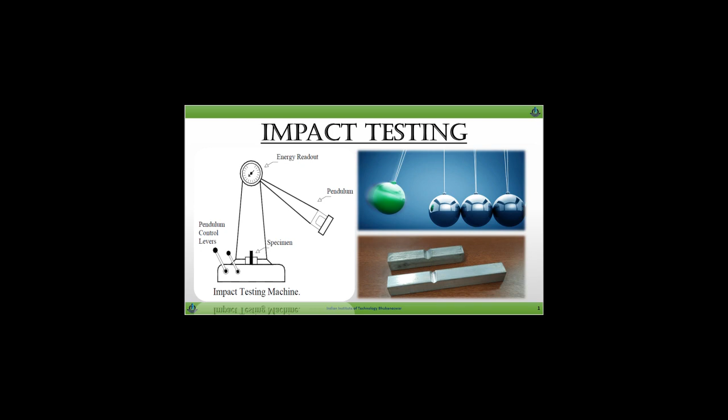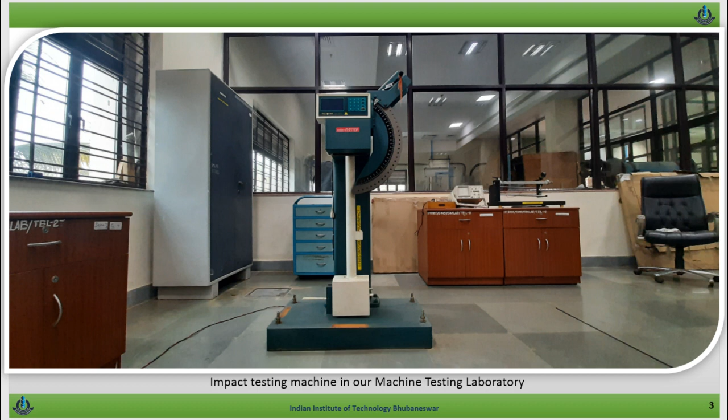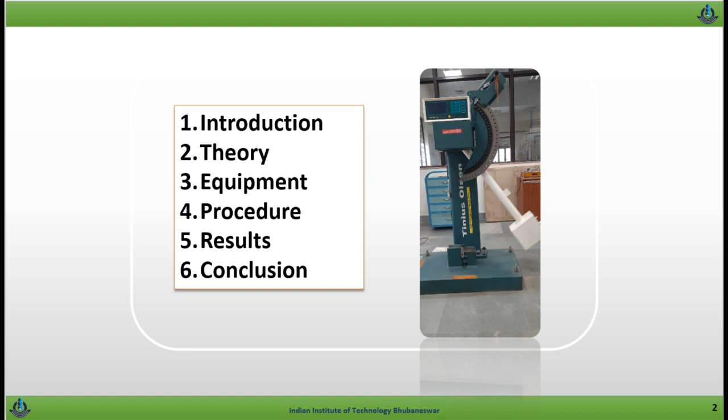Impact test is a material test. In mechanics, an impact is a high force or shock applied over a short time period when two or more bodies collide. Such a force or acceleration usually has a greater effect than a lower force applied over a proportionately longer period. The effect depends critically on the relative velocity of the bodies to one another.

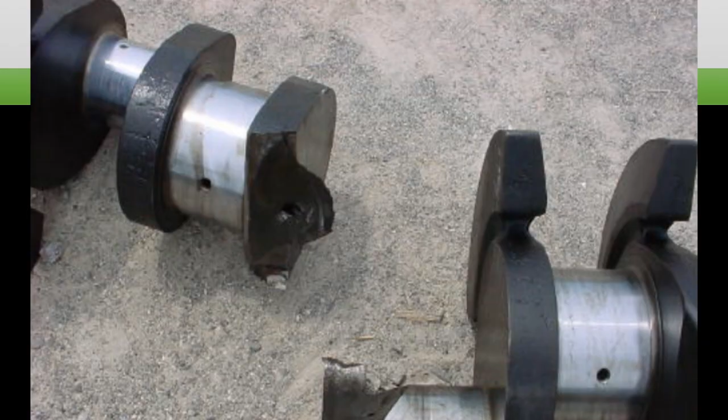Impact is a very important phenomenon in governing the life of a structure. For example, in the case of an aircraft, impact can take place by a bird hitting a plane while it is cruising, or during takeoff and landing, the aircraft may be struck by debris present on the runway, as well as other causes. It must also be calculated for roads if speed breakers are present, and in bridge construction where vehicles cause impact loads, etc.

Impact tests are used in studying the toughness of material. A material's toughness is a factor of its ability to absorb energy during plastic deformation. Brittle materials have low toughness as a result of the small amount of plastic deformation they can endure.

Impact testing most commonly consists of Charpy and Izod specimen configurations. Therefore, two kinds of impact tests are discussed here: one is the Charpy test and the second is the Izod test.

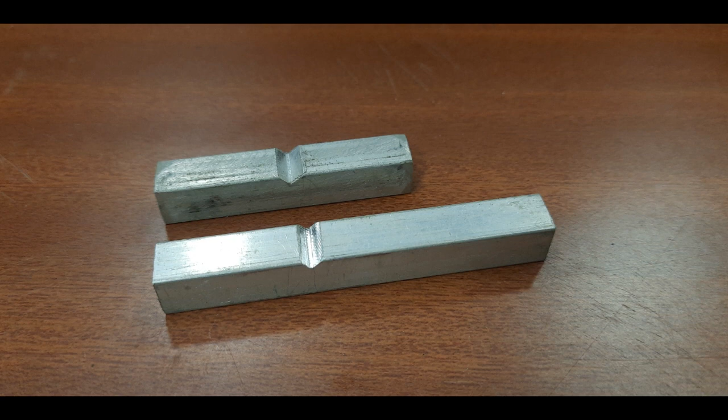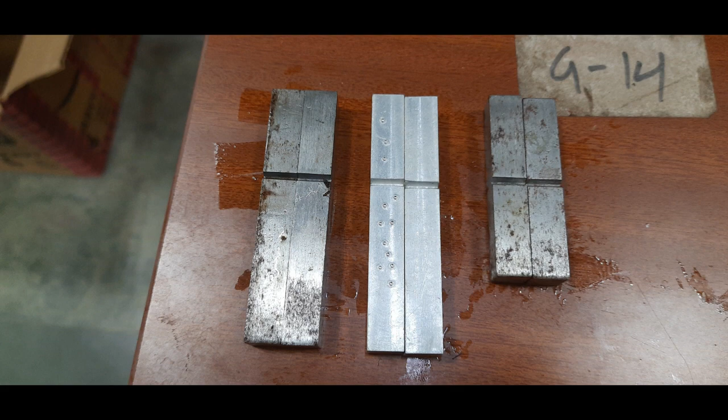The Charpy impact test, also known as the Charpy V-notch test, is a standardized high strain rate test which determines the amount of energy absorbed by a material during fracture. Absorbed energy is a measure of the material's notch toughness.

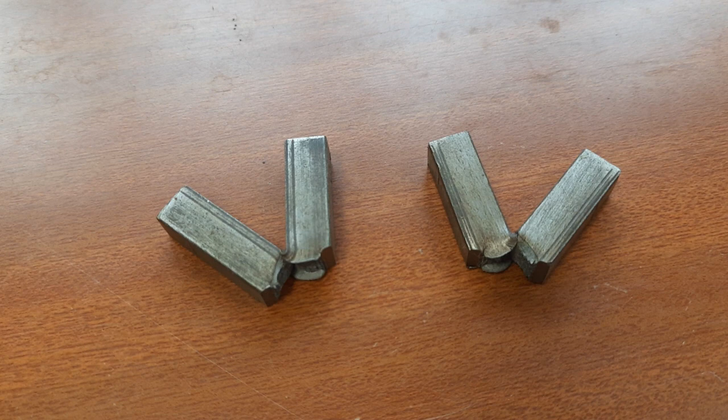The test was developed around 1900 by S.B. Russell and George Charpy. It is widely used in industry since it is easy to prepare and conduct. The results can be obtained quickly and cheaply. A disadvantage is that some results are only comparative.

According to ASTM E23, the standard specimen size for Charpy impact testing is 10 mm by 10 mm by 55 mm. The specimen in the Charpy test is loaded in a 3-point bending configuration.

In our lab, for the test, we choose the ASTM E23 standard from the other various standards. Apart from that, there is the Izod test.

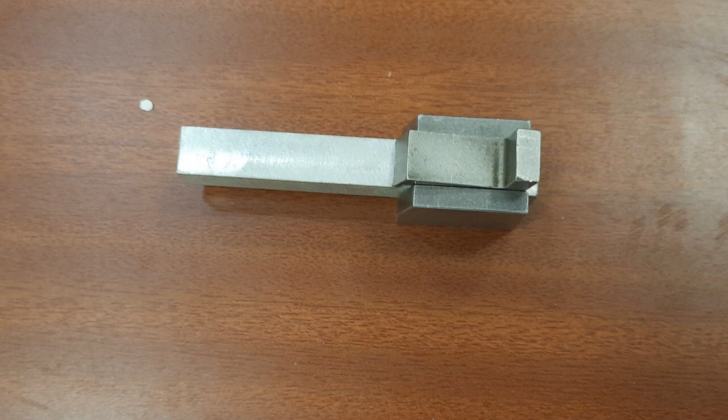The Izod impact strength test is an ASTM standard method of determining the impact resistance of material. The test is similar to the Charpy impact test but uses a different arrangement of the specimen under test. The Izod impact test differs from the Charpy impact test in that the sample is held in a cantilever beam configuration, in contrast to the 3-point bending configuration in the Charpy test.

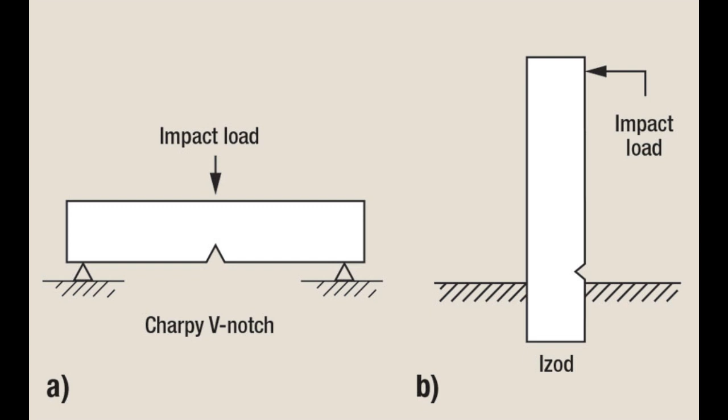The test is named after the English engineer Edwin Gilbert Izod. According to ASTM E23, the standard specimen size for Izod impact testing is 10 mm by 10 mm by 75 mm, which has been taken for our test.

The impact value of a material can also change with temperature. Generally, at lower temperatures, the impact energy of a material is decreased. The size of a specimen may also affect the value of the Izod impact test because it may allow a different number of imperfections in the material, which can act as a stress riser and lower the impact energy.

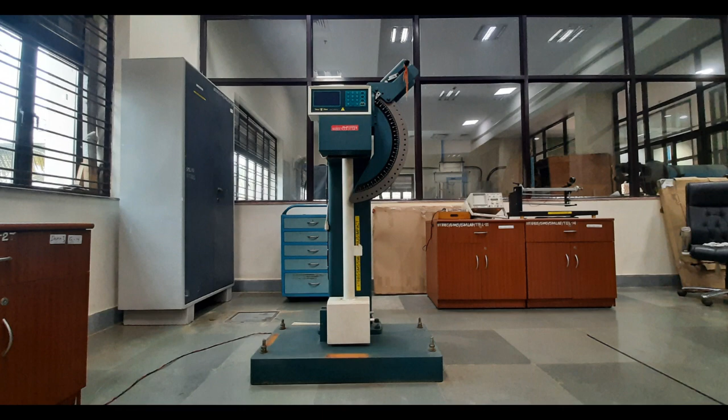The impact tests are conducted on instrumented machines capable of measuring less than 1 foot-pound to 300 foot-pound, at temperatures ranging from -320 Fahrenheit to over 2000 Fahrenheit.

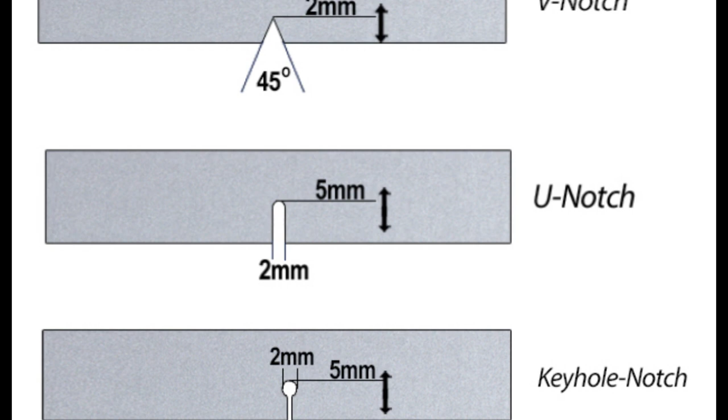Impact test specimen types include notch configurations such as V-notch, U-notch, keyhole notch, etc. The notch in the sample affects the result of the impact test. Thus, it is necessary for the notch to be of regular dimensions and geometry.

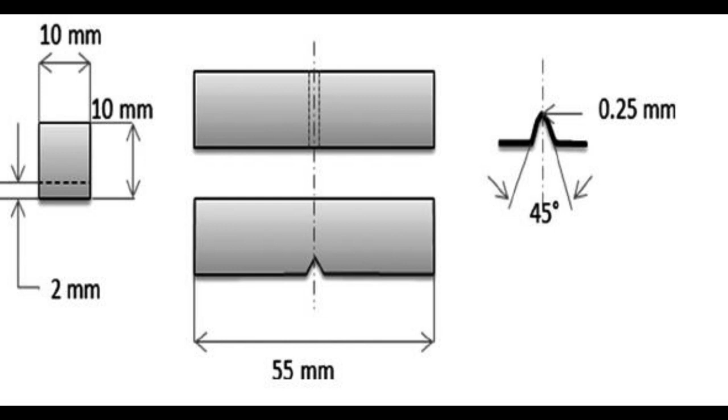The standard method for notched bar impact testing of metallic material can be found in ASTM E23, ISO 148, and etc., where all the aspects of the test and equipment used are described in detail. Currently, in our lab, we use the ASTM E23 standard for testing.

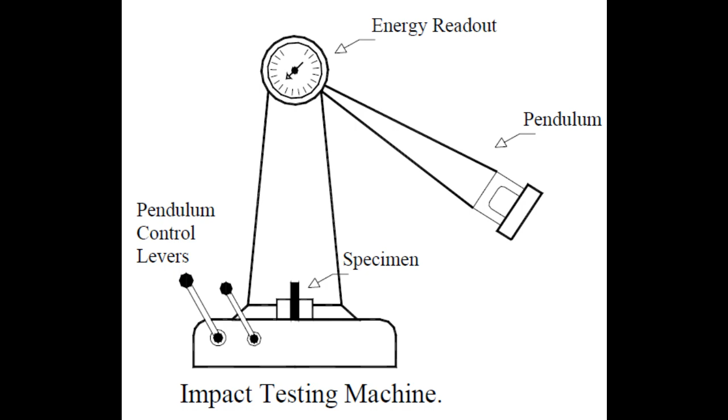In this test, the apparatus consists of a pendulum of known mass and length that is dropped from a known height to impact a notched specimen of material. The arm swings down, hitting the notched sample, breaking the specimen.

The energy transferred to the material can be inferred by comparing the difference in the height of the hammer before and after the fracture, that is, the energy absorbed by the fracture event. The apparatus for performing the impact test is illustrated schematically in the figure.

The load is applied as an impact blow from a weight pendulum hammer that is released from a position at a fixed height h naught. The specimen is positioned at the base, and with the release of pendulum, which has a knife edge, it strikes and fractures the specimen at the notch.

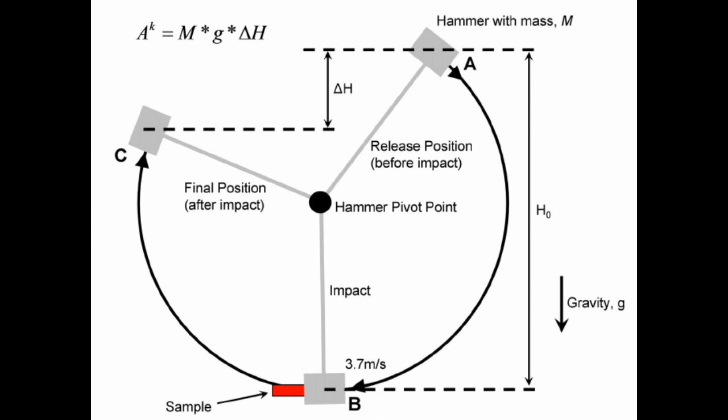The pendulum, after its swing, rises to a maximum height h dash, which should naturally be lower than h naught. The energy absorbed at fracture, E, can be obtained by calculating the difference in potential energy of the pendulum before and after the test, such that E equals mg times h naught minus h dash, where m is the mass of the pendulum and g is the gravitational acceleration.

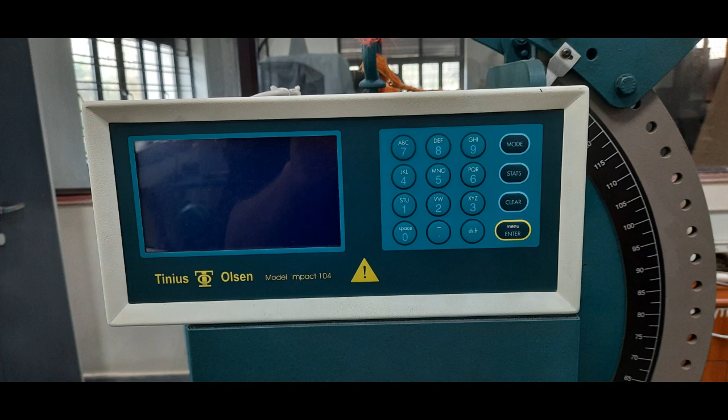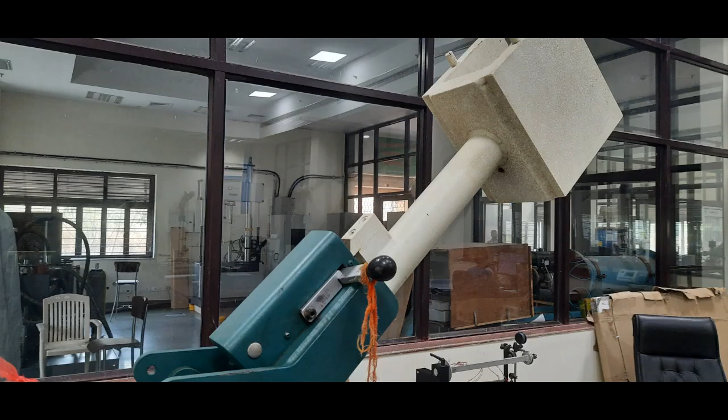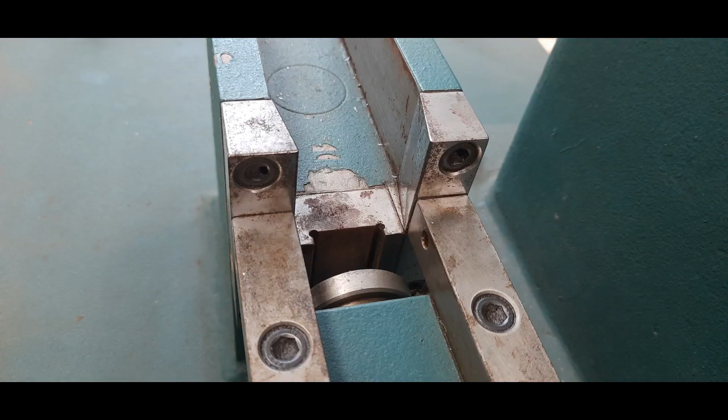To perform the impact test in our lab, we have an impact testing machine from a company named Tinius Olsen. The model number is Impact 104, based on the ASTM E23 standard for specimen testing. The machine consists of a base, a pillar on the base, a pendulum arrangement on the pillar, a hammer at the end of the pendulum rod, a striker arrangement on the hammer with struts, a specimen mount on the base, and a screen with encoder for toughness readings.

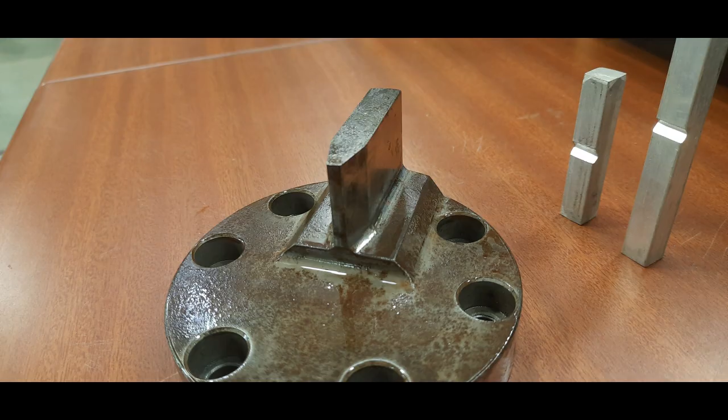There are two types of strikers, one for Izod test and second one for Charpy test, as shown in the figure. One specimen holder and strut tightener are also there in the machine.

Now we are going to discuss the procedure for the test. First, we prepare the test specimen. We put on safety glasses for our safety. Now, after that, move the pendulum up to its locked position and ensure that it is locked in place.

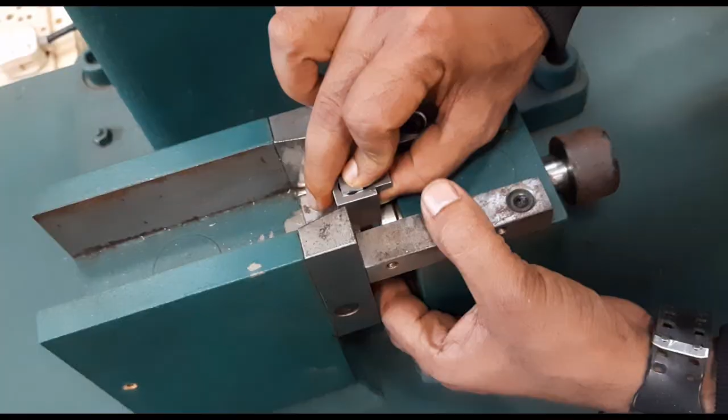Place the sample in position for the Charpy test. The sample lies against the stop support on both sides, with the notch facing away from the direction the pendulum will come. For Izod, clamp the test piece into the jig with the notch facing toward the direction the pendulum will come, and the notch at the point of support.

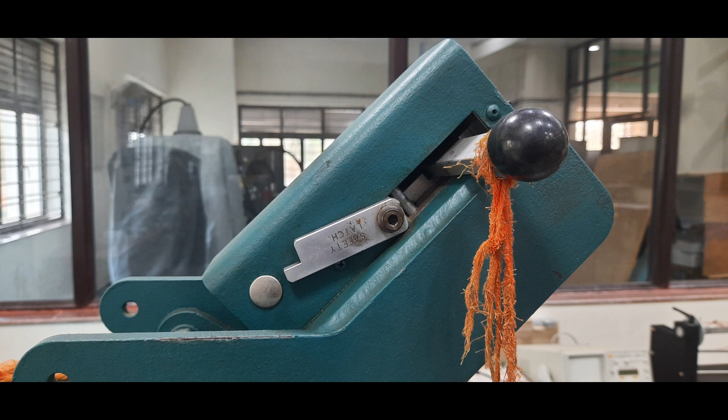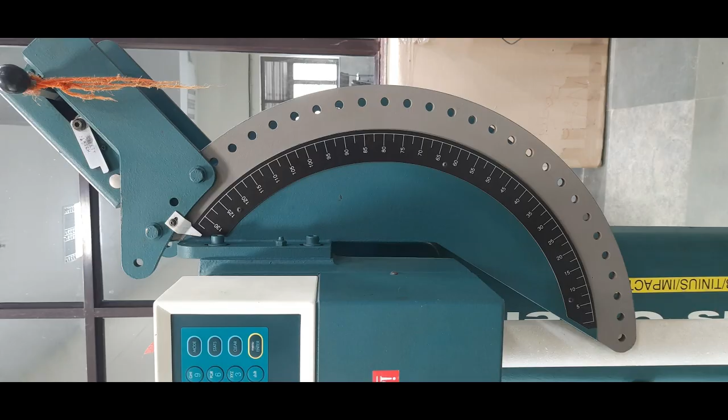Now ensure that all safety guards are in place, ensuring that the path of swing for the pendulum is clear. Now it is time to release. Release the pendulum using the release mechanism. Record the readout from the display of the test equipment. Return the pendulum to its position.

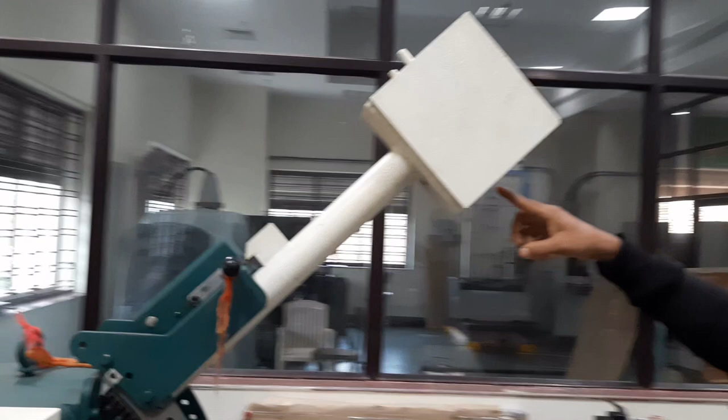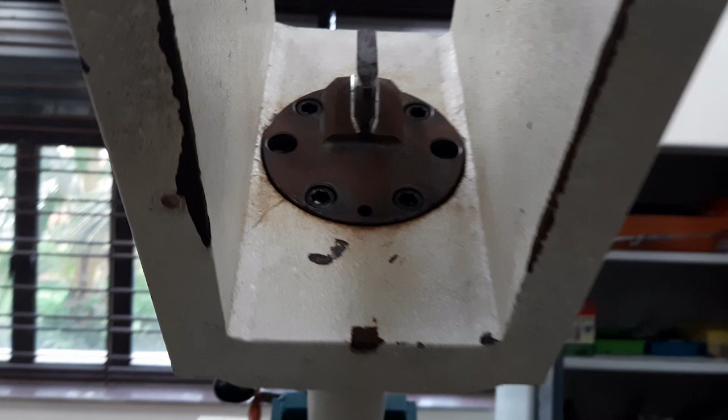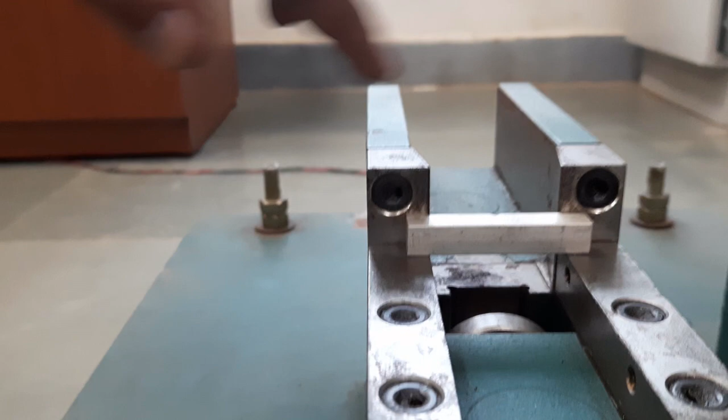A notch has to be kept on the opposite side from the striker, or at the center.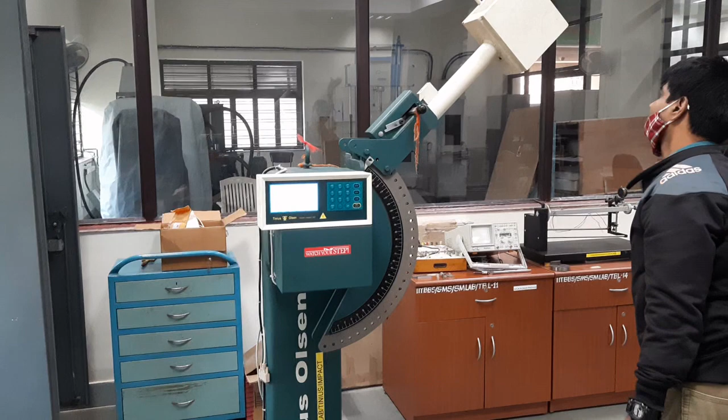Now we discuss the results from the test. For our impact test, we perform a total of 8 tests, that is 4 each for the Izod and Charpy tests. The specimen materials used for the test are aluminium and mild steel, with 2 different tests performed. The total potential energy stored in the pendulum at its highest position is 407.54 joules.

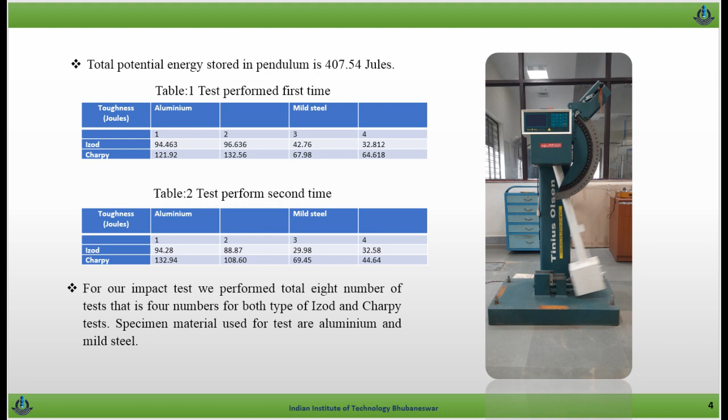The test results are shown in the various tables. As the results demonstrate a wide variation, as seen by the large range in the results, little can be concluded from this experiment. The reason behind the variations is due to the preparation of the test pieces, which were made by hand with little control over notching in particular.

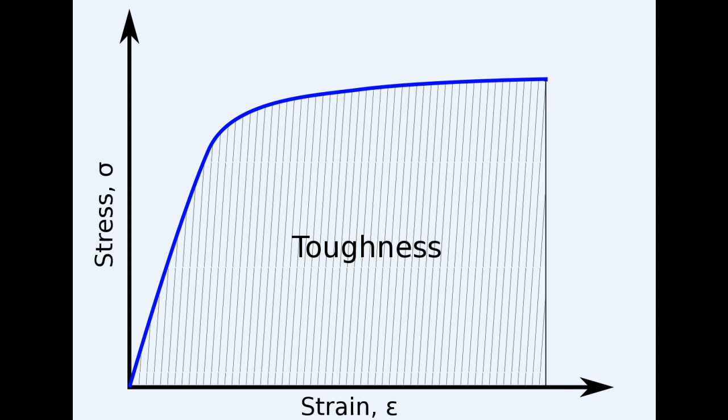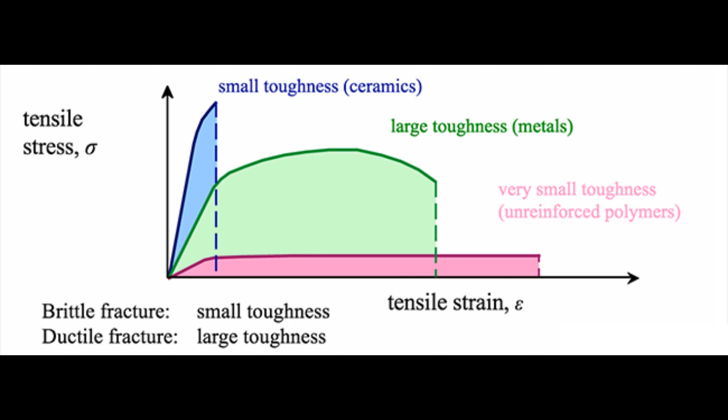We can conclude from the results that toughness for ductile material is high, whereas for brittle material it is low. Brittle materials have low toughness as a result of the small amount of plastic deformation they can endure.

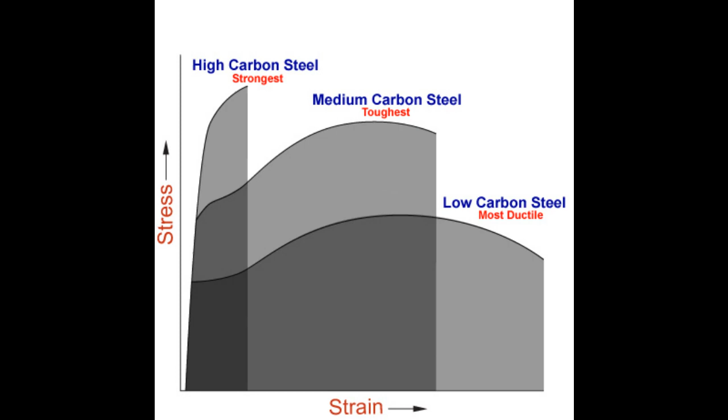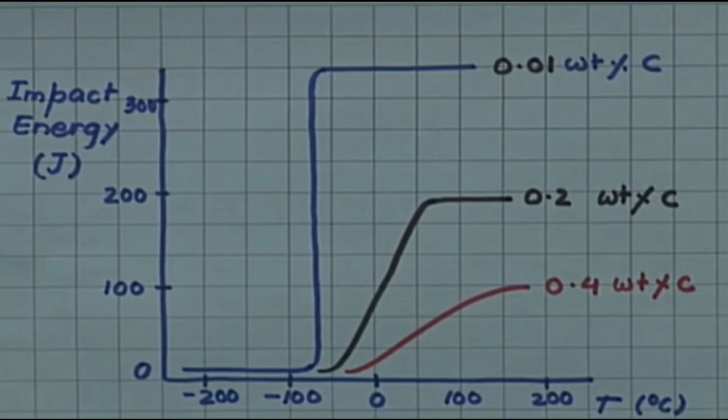Apart from this, sometimes ductile materials also show brittle behavior at a particular temperature, a transition known as ductile to brittle transition. As you can see from the figure, for plain carbon steel there is a transition from ductile to brittle at T dBt.